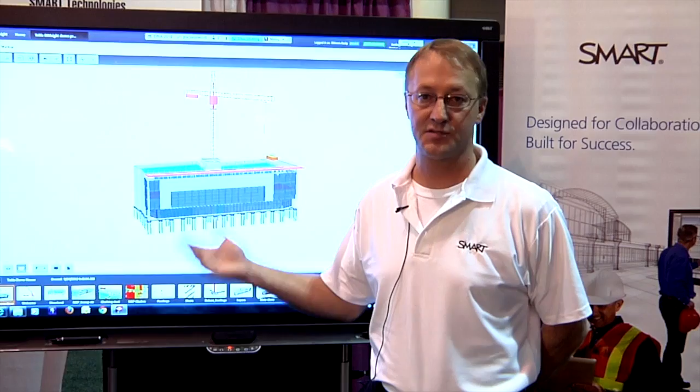I'm Andy, I'm with Smart Technologies, and we're here at the DBIA Expo to showcase the latest integration between Smart Technologies, Smart Interactive Display, and Tekla BIMsight. What we've done is worked together with Tekla to create an integration between our two product families to dramatically enhance the collaboration of coordination reviews for the construction industry.

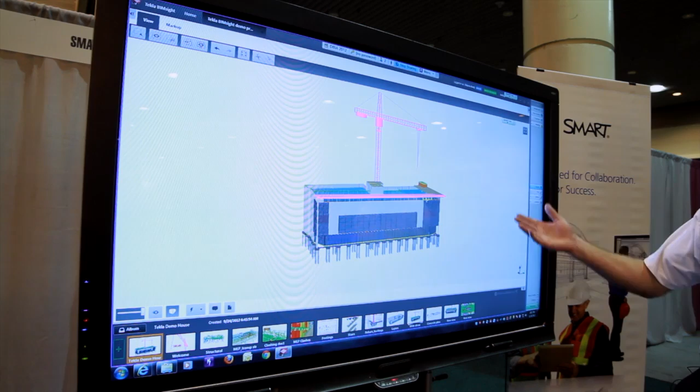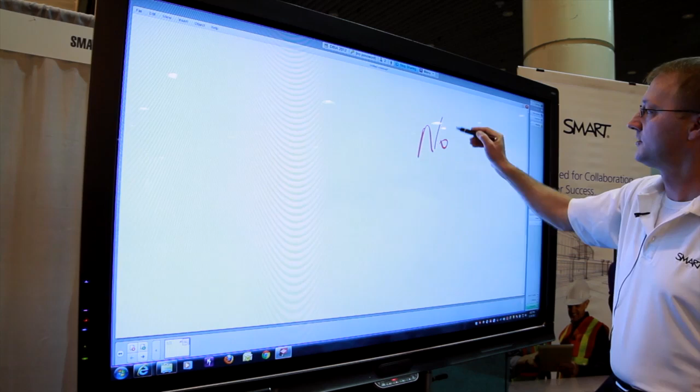So what I'm running here is the latest version of Tekla BIMsight running on a Smartboard, our 8070i model. I'm also running the Smart Freestorm Visual Collaboration Solution software, which allows me to toggle back and forth between my whiteboard, where I can take notes, and my desktop, where I'm running my BIM.

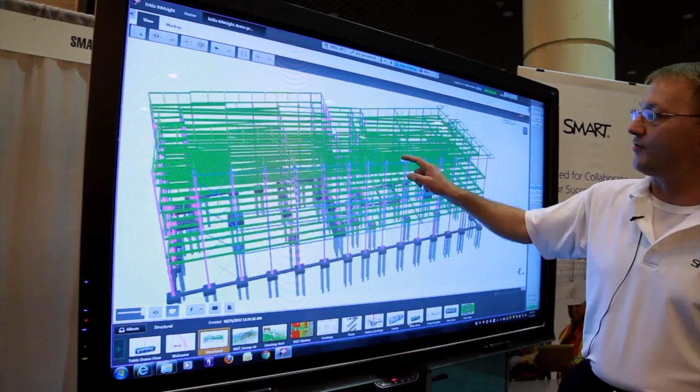So in Tekla BIMsight, let me just go to another model here. A core part of the integration was to include gestures as a means to navigate through the model. So now, taking advantage of the smart touch recognition, with one finger I can orbit about the model, two fingers I can zoom in, and I can pan and get to a point where maybe I'm with my construction team and I want to review an issue we're having with the model.

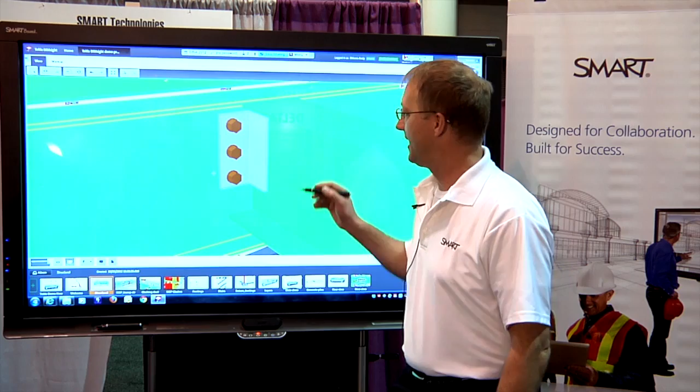The integration also allows me to pick up a Smartboard pen and make annotations, redline markups, directly into the BIM model, not as an overlay, but actually as part of the model. So now when I navigate through the model, the ink stays with my view.

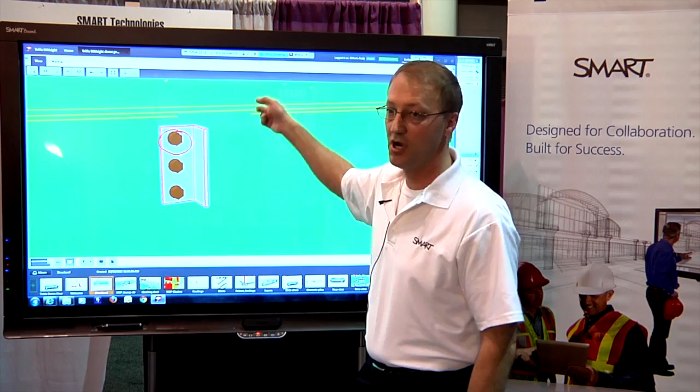Because I'm running Freestorm collaboration software, I can also share this with remote users using another Smartboard, a laptop, or an iPad, who can take their ink and also make annotations directly into the model remotely. This is now part of the model, and the ink stays with the object that I've annotated on. That's a key part of the integration that Tekla BIMsight has done with Smart Technologies.

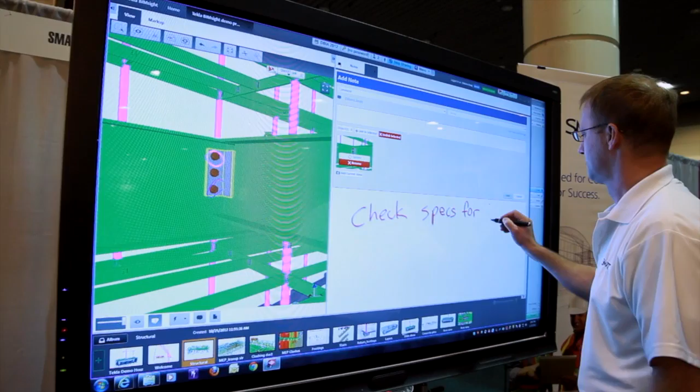Now that I have the view and the initial markup of the model, I can add additional notes about it using the BIMsight note capability. By using the Smart Ink, I can handwrite my notes and inject them directly into the notes field. I just touch where I want the notes to go, and they're captured and taken right in.

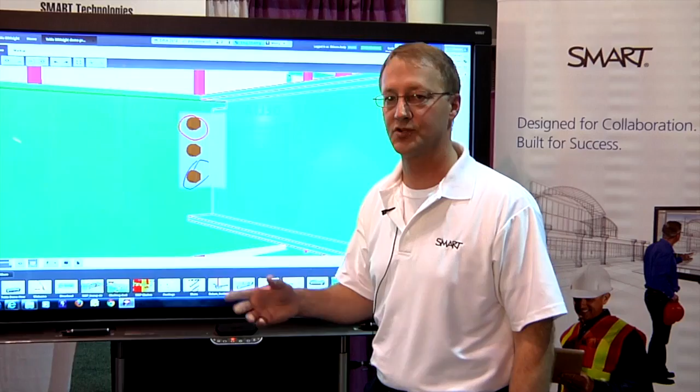Another capability unique to this is that I don't have to make my markups or notes directly into the model itself, but I can take screen captures using Meeting Pro and do ad hoc notes in a whiteboard scenario. So let's say I want to go back to my main view of the structure, zoom in, and look at the footings, and maybe do some ad hoc notes on this.

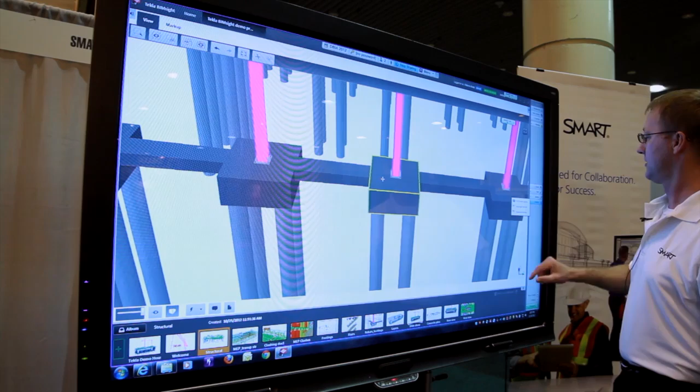With my Smart Meeting Pro whiteboard capture, I just drag the area that I want to review, go back into my whiteboard, and now I have an image in my whiteboard that I can resize, move around, and most importantly, add additional detail to.

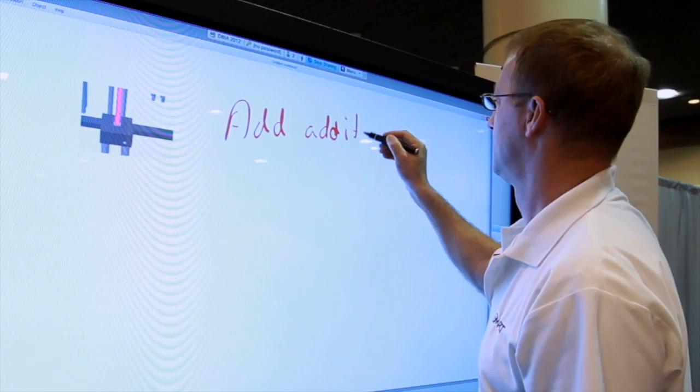And I can add as many of these captures as I want, save this as a PDF, and distribute it to the team members electronically. One thing that's really important to note is that anything I've added in my model with Smart Ink as a note stays with the model, as well as the markups I've added.

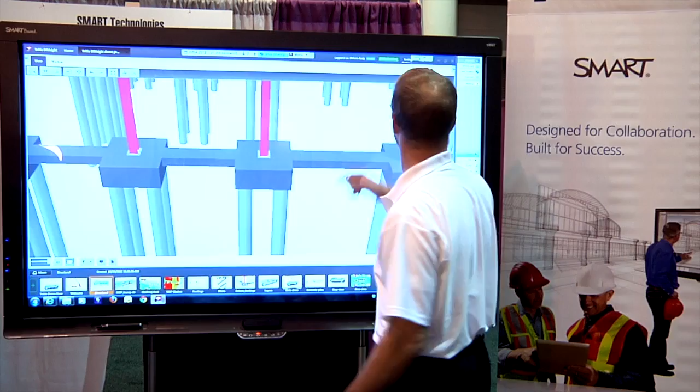So I'm going to go back into my notes here. Let's say we want to look at a note I made earlier about the model. I double tap in the notes area, tap on the note, and now I'm back to my previous model. I can still annotate, navigate, and add additional comments here, and that stays as part of the model.

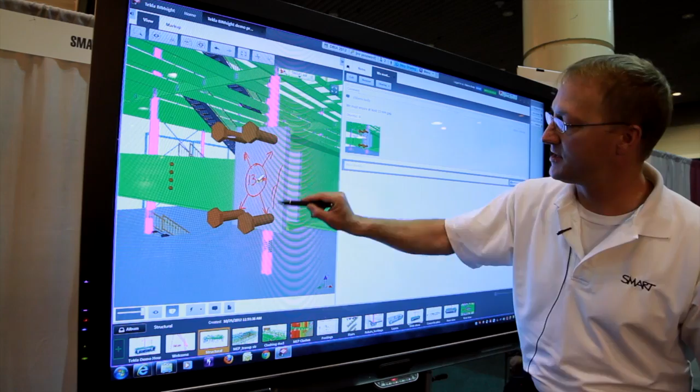So the Smart Ink is now being embedded as part of the Tekla markup right into the model, and I still retain the ability to add additional notes on this side.